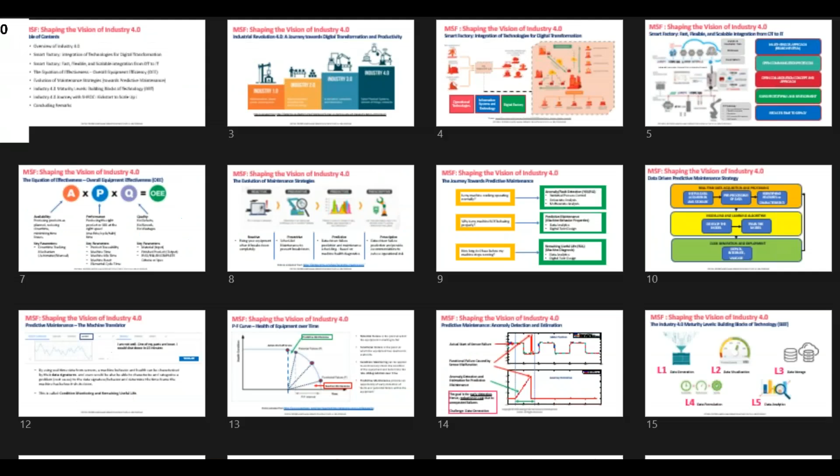MEPN, which stands for the Machinery and Equipment Productivity Nexus, was set up as one of the 9 productivity nexuses under the Malaysia Productivity Blueprint introduced in May 2017. The main purpose of the productivity nexus is to drive the implementation of the initiatives of each subsector as outlined in the blueprint, in close partnership with the government. The Machinery and Engineering Industries Federation, or MEIF in short, has been tasked to champion MEPN on behalf of the machinery and equipment subsector. MEIF is a federation consisting of 8 association members and 1 university member, with a combined membership in excess of 6,000.

In 2017, the machinery and equipment subsector contributed 2.6% of the manufacturing sector's total added value and employed about 93,000 workers. In MEPN, I'm leading one of the working groups focusing on talent and manpower development. This webinar is one of our initiatives working in collaboration with MPC and Selangor Human Resource Development Center, targeting business owners, managers, and engineers of manufacturers, especially SMEs, who are keen to start their journey to IR 4.0.

The title for today's webinar is Smart Factory: Data Generation to Predictive Maintenance. Our speaker for today is Dr. Chua Wen-Shyan. Before I pass the mic to him, let me do a short introduction with his biodata.

Dr. Chua is currently the head of Malaysia's Smart Factory 4.0 under the Selangor Human Resource Development Center. He obtained his PhD in Control Systems Engineering and Bachelor of Engineering in Mechatronics Engineering from Monash University, Malaysia. His key areas of expertise lie mainly in control and automation systems, fault detection and identification, and predictive maintenance strategies. He is actively involved in the IET Control and Automation Technical Professional Network, and is also an active member of the Industry Advisory Panel of Monash University, Malaysia, in the Mechatronics Engineering Department.

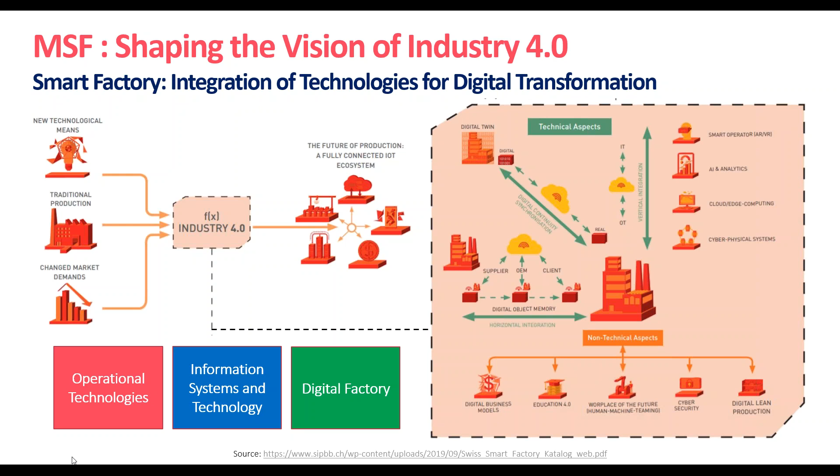So with smart factory, when we look at integration of technologies, we want to see how these technologies can be integrated through a fast, flexible, and scalable integration. We don't want technologies taking too long to integrate, eventually taking a very long time to deploy - that's when you lose time, and time is basically cost.

So when we look at smart factory, we think about it as a multi-vendor approach. Every machine needs to talk together. You have different brands of equipment coming together, different interfaces coming together, but all these equipment and interfaces need to talk to each other.

That's where you look at open communication protocols. If you think about machines, it's a similar concept as humans - when we want to communicate, there's always a common language we try to communicate with, like English. Similarly with machines, there will be a common language where each machine has to talk to each other.

If there is no common language, then of course you have a translator, right? So like, for example, we have Google Translate to translate English to a different language that we want to converse in. So same for machines, that actually happens as well.

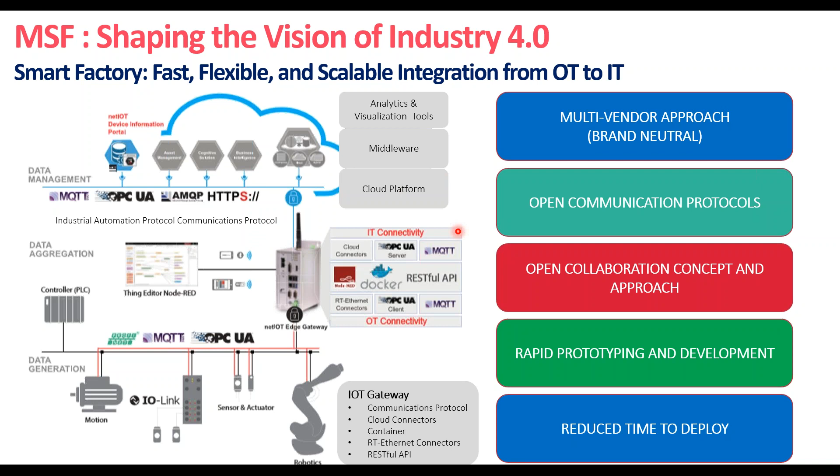When you look at this diagram, at the shop floor you have data generation. You collect all the data from the shop floor with the communication protocols. You integrate it with a middleware, which is where your data aggregation comes in. And of course, what you want to achieve later on is you want to push this data into a database, right? You want to manage the data. That's where your data management and storage comes in. And all this needs to be integrated more or less seamlessly with regards to the overall smart factory concept.

So smart factory automation, or how we see it, is basically an integration of technologies. You don't just look at equipment and say that my machine needs to generate data, I want to make my machine generate data. We need to look at overall factory processes. What is actually important to you to have information? What you want is information.

And of course, you look at industrial augmented reality, if that works for you, to really look at the product specifications through vision scanning. And all these are basically a particular operation where you want to integrate all these technologies and obtain information from every single level. You want to make sure that all this information is collected, aggregated, and managed throughout the entire smart factory automation system that you have. So that's how the integration of technologies comes about.

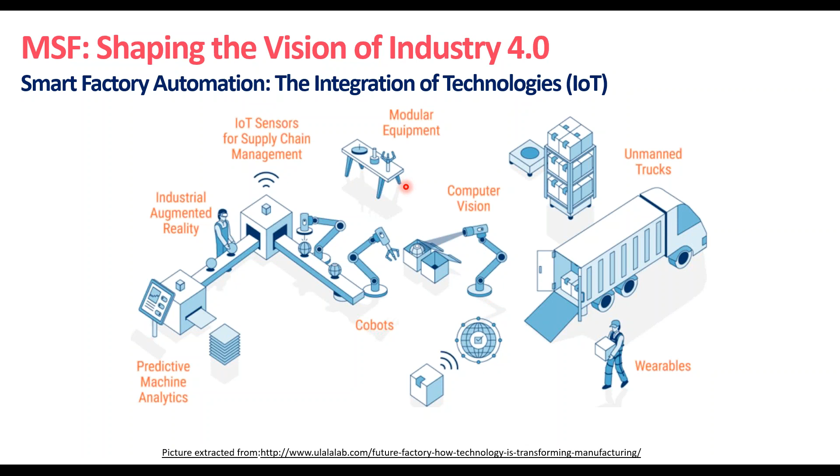So once you have all this information, you get information from your machines, from your shop floor, from your logistics. What you really want to do is find an equation of effectiveness. You want to understand if your current operation is really productive, efficient, and effective. So one example of how we look at effectiveness for machines or production is basically the overall equipment effectiveness.

You look at performance. So for example, you buy a machine, there's a spec that says you can produce maybe 1,000 in 1 hour, but your actual production is only maybe 500 in 1 hour.

Why? So that's where performance comes in. You need to look at what's your machine cycle time, what is your machine idle time, and what's your machine time or operation time actually moving. That's where performance actually comes in.

Now when you look at A and P, that's not just the overall variable of the equation. You want to produce good parts, good quality parts that meet your customer specifications. So then the next variable comes in, which is Q. You look at quality—you don't want to affect the quality. If you increase your performance, you may actually affect your quality.

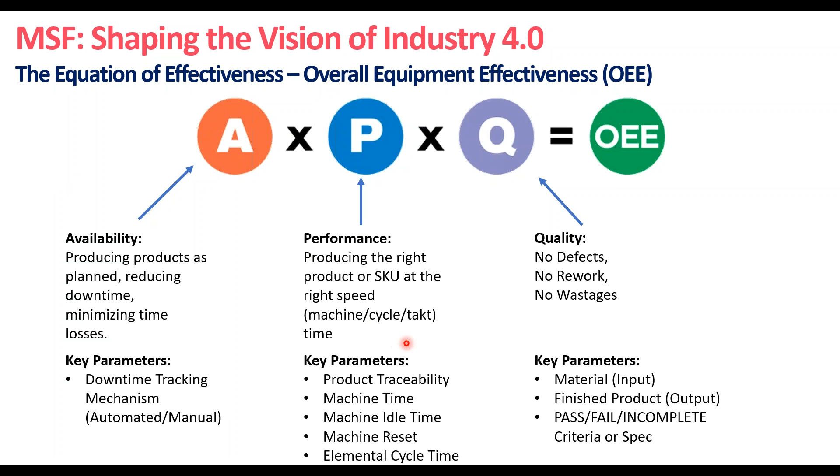So all these are actually related to each other, and that's where we get, for example, an equation of effectiveness called OEE. So that's how you actually look at how data can give you that kind of information or traceability towards developing what we call the equation of effectiveness.

So then when we look at data, what else can data do to really help you in your daily operations? When we look at the evolution of maintenance strategies, we want to go into strategies where it doesn't involve a lot of cost, and doesn't involve sudden surprises or breakdowns. That's where we look at predictive maintenance and prescriptive maintenance.

When you look at reactive maintenance strategy, it's basically fixing your equipment when it breaks down completely. That's the point when you see, oh, my machine is down and I need to fix it now. That actually creates a lot of surprises. When your machine suddenly just breaks down, you have to quickly gather the spare parts to actually fix it, and that takes up time.

So what some industries actually move towards is preventive maintenance. You have PM times—at a particular month, this machine needs to go through a preventive maintenance scheduling. They need to schedule it, replace whatever parts within the line, clean up the line, fix in the right spare parts, and that is basically scheduled maintenance to prevent breakdowns.

Now when we look at predictive maintenance, that's another level altogether. You actually look at data-driven methods to predict when your machine is actually going to fail. You're able to understand some of the signatures or behavior of the machines, the machine health diagnostic, to understand that your machine is going to break down or is bound to break down. That's something we will discuss in more detail in a short while.

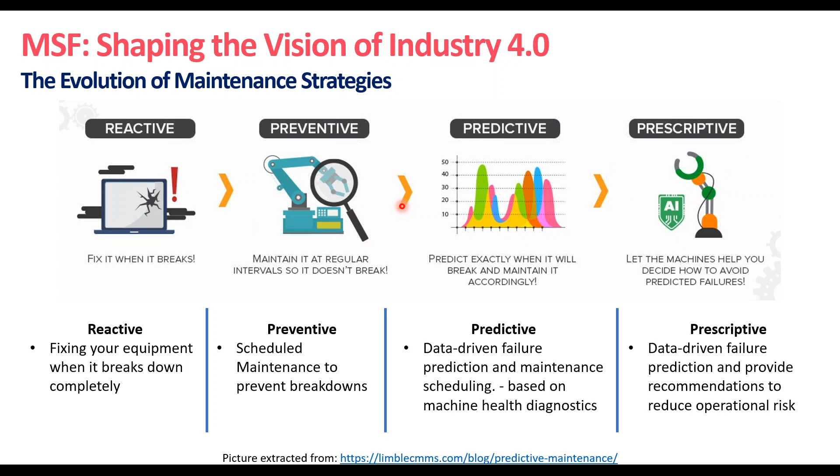Now when we think about prescriptive maintenance, when we put AI in the picture, that's something beyond predictive maintenance, where you have a set of known failures and known recommended strategies to overcome those failures. When you match them together, that's when AI comes into place to really help you in your maintenance strategy. So when a personnel comes to maintain a machine, they know what to do at a very fast pace. That's basically what the evolution of maintenance strategies we share here is all talking about.

Now when we look at the journey towards predictive maintenance, we really need to ask ourselves three questions about what we really intend to achieve. Do you just want to know whether your machine is operating normally? Or do you want to know why your machine is not behaving properly? Or do you really want to know how long do I have before my machine stops running?

So when you want to know whether your machine works normally or not, that's really more of anomaly or fault detection. You want to know whether there is an anomaly in the system that will affect your machine to be at a stage where it is not healthy anymore. When it's not healthy, it will start to slowly degrade and start to break down. So do you want to detect that anomaly at a very fast pace, and do you just want to know that, oh, I have a problem and therefore I will stop the machine? Or do you want to then go deeper into why my machine is not behaving properly?

That's when predictive analytics comes in. You are able to identify what is the signature of the machine that is telling you that it's not behaving properly. For example, is it a bearing having a problem, or is there some problem with the sensor, or is there some other problem like a leakage in the system that we don't know? So that's where predictive analytics comes in.

Now, how long more do I have before my machine stops running? That is basically what we look at in a term called remaining useful life, which is slightly beyond predictive maintenance. With the analytics information you have, you're able to predict the rate of degradation, and eventually understand how long more you have before your machine will stop running. That's the overall picture of the journey towards predictive maintenance.

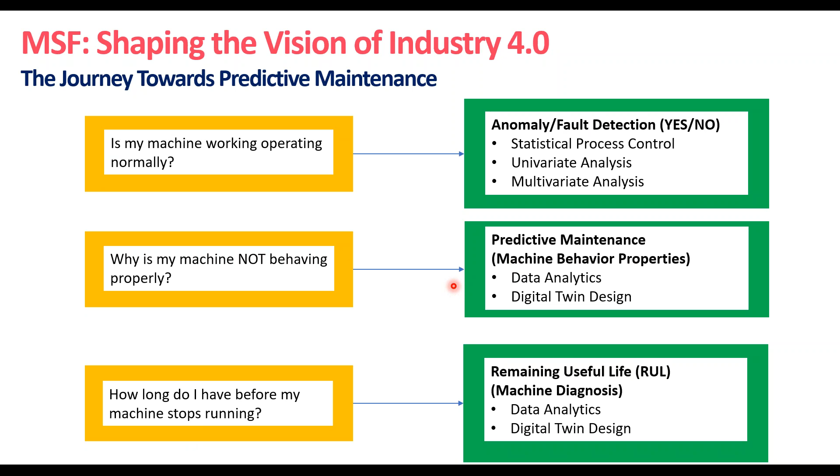Strategies of predictive maintenance really revolve around a similar concept. What we look at is data. You really need data to understand the predictive maintenance strategy. It's a data-driven strategy, so you look at real-time data acquisition and processing, where you take useful data. I must emphasize the word useful, because a lot of people have a lot of data, but most of it is not useful to actually do a predictive maintenance strategy. What we want to emphasize is collection of useful data, and you store it and pre-process the data.

In layman terms, you have a lot of information about a person, and what you really require is useful information to identify their behavior, their characteristics, or their features that signify what that person is all about. From there you develop a model with all this information, trying to have a first impression of a person. You develop the model, and then you train it so you actually understand better what the entire model is trying to tell you. Once you're ready, you deploy it, integrate it into your system, and you have to validate again.

It's a continuous loop. It's not as simple as just putting a tool there that tells you every piece of information about the machine. It's not that straightforward, because a lot of times there's a lot of data involved, and there's a lot of features and characteristics you need to identify, because processes in a factory are very, very different. It's like you need a universal bank or database of data that you can use to do all your feature characteristics.

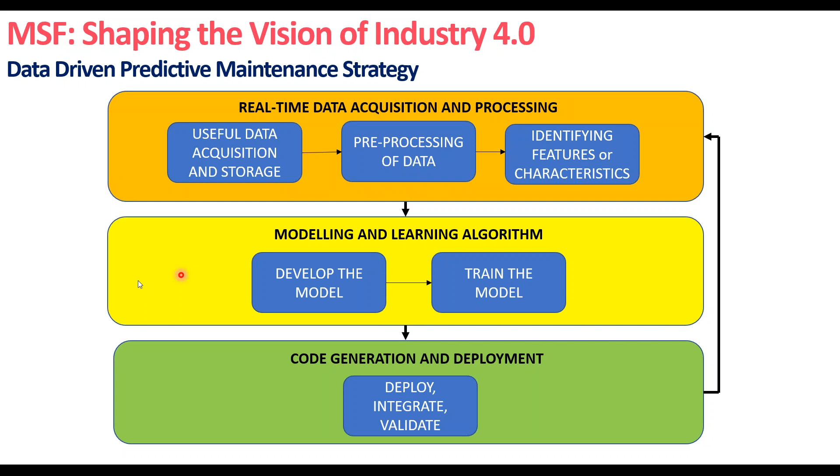That's where data storage is very important, to identify your historian data and develop a better predictive maintenance strategy. So very simply put, how this whole predictive maintenance works is you think about it as a machine translator. Like I mentioned before, machines can talk to you. All you need is for them to tell you in a language you understand. Think about it like Google Translate — you put in English, and you get Spanish or Chinese or any other language you want. Machines are the same, except instead of alphabetical languages, what it provides you is values, data.

If you look at this signal, for example, this is a signal of a motor, and what your algorithm needs to do is detect this, scan through it, and it will tell you, for example, that I am not well — the machine is not operating properly. Using these kinds of data signatures, you're able to predict or detect whether your machine is operating properly or not. That's basically what we call anomaly detection. Based on the data, you're able to tell that the machine is not working.

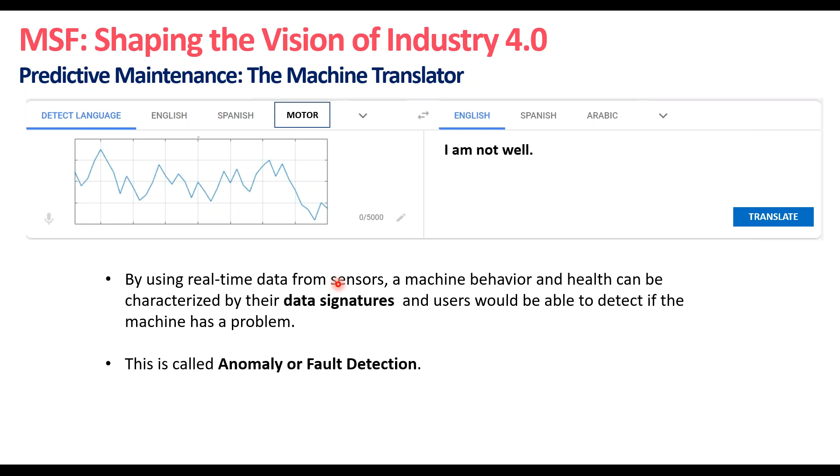When you want to deep dive further, you take the same data set and scan it further to really understand if there are any underlying problems that aren't obvious. You want to diagnose the machine — why is it not well? So you put in other algorithms to look deeper, based on historical data, to find that, okay, I'm not well, and the reason is one of my parts is loose. Then you want to drill down further into how long you have before it shuts down. That's the overall strategy of anomaly detection, predictive maintenance, and remaining useful life. So whatever data you collect is able to inform you of this information through time.

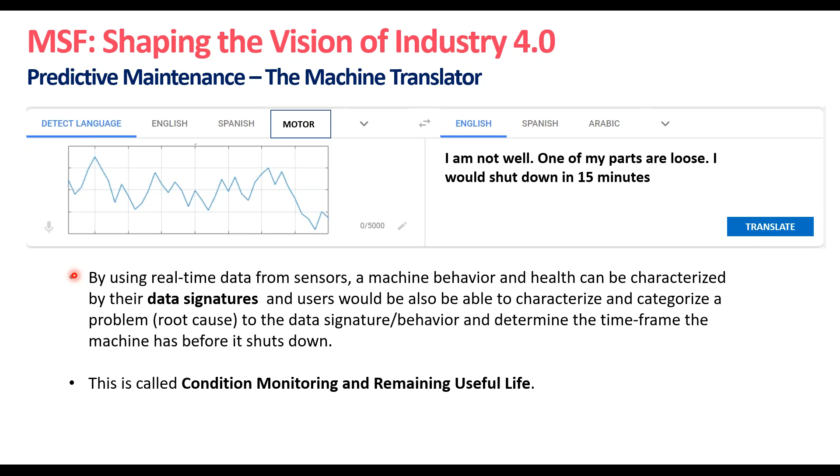And once you're actually able to achieve this, you are able to achieve predictive maintenance and understand the remaining useful life strategies, and that will give you a lot of insight towards your current production systems on whether your systems are operating well, if they are in good shape, and you are able to increase the useful life of machines.

But what affects this is that your cost will actually increase, and of course when you stop the machine and implement downtime, that will affect the overall flow, scheduling, and cost of your particular production.

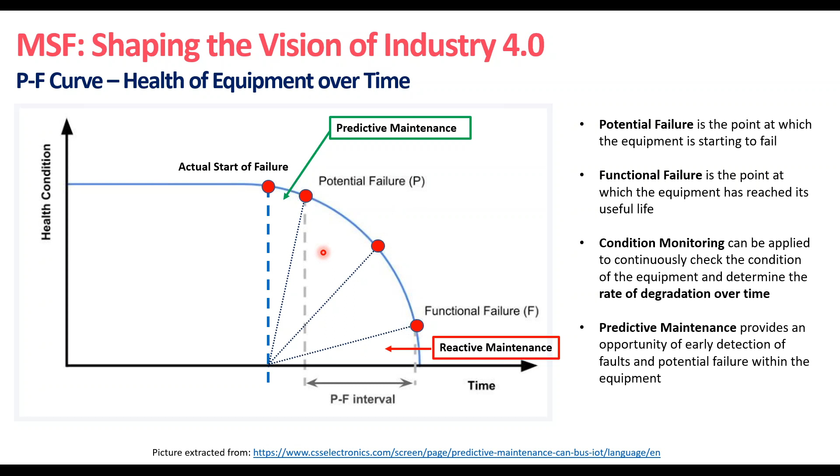So if you look at this diagram, this is a very straightforward diagram describing how your actual start of failure looks like, your functional failure looks like, and your anomaly detection and estimation procedures, which will help you predict the actual failure.

So let's look at these two diagrams. You have motor position, which is your motor running at a standard phase. And then what happens here is there is a big spike, because there is a sudden surge of anomaly within the particular system, which we do not know - there could be a sudden sensor problem, a sudden bearing problem, or actuator problem, which we need to find out.

So if you put in your anomaly detection and estimation strategies for predictive maintenance, what happens in this second graph is you could see a gradual increase of degradation or signals from your sensors that show there is a problem. And if you put in the right strategies, you're able to estimate this particular signal, and before this functional failure happens, you're able to take the necessary steps to mitigate this from happening.

So if you look at this here, you actually see some form of degradation, a very minimal part of degradation, but you are not able to tell whether it's really a machine problem or maybe just your data collection problem.

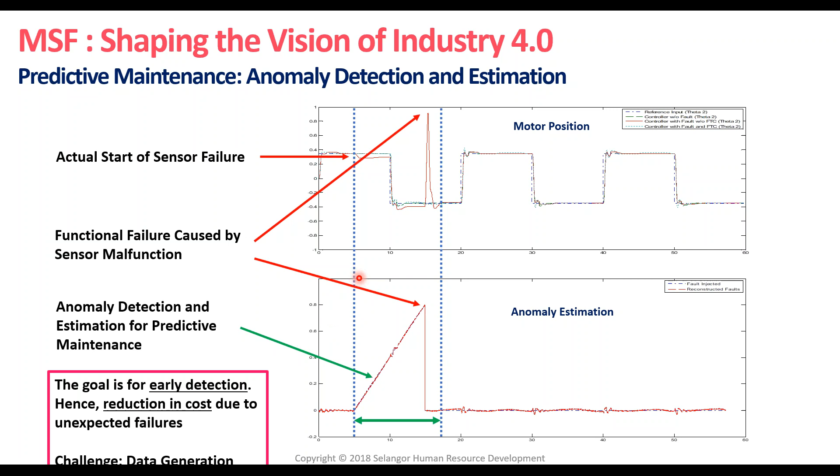So that basically is all data driven, and machines learn in that kind of manner. You need to give them enough data to identify what is different, what is a feature or characteristic of an apple or orange, for it to understand that this is definitely not an apple and this is an orange. So that's what you intend to achieve in the overall predictive maintenance strategy, and that really boils down to the key component, which is data generation.

And with that, let me bring you closer to how we want to achieve effective and accurate predictive maintenance. So we really look at the whole Industry 4.0 maturity levels, and break it down even further. You have the pillar concept, the integration-based concept, which is broken down into 3. Now we go deeper into really looking at the maturity levels of each industry, in terms of building blocks of technology. So we break it down into 5 levels.

Level 1 is data generation. If your machine is producing data, then that's very, very good. If not, you're still at level 1. Now next, level 2, you look at visualization. So when you collect a lot of data, you want to basically make sense of it, and you want to visualize it such that you want to see features along the way. And that's where data visualization comes about — you want to see how this data plotted together will actually look like.

With generation of data visualization comes the important concept of storage. You have many cycles of machines running per day, and you don't want to just collect for one week then discard it. You want to look at overall machine health throughout a certain period of time. As you look at the P to F curve, you have a very straight line of machine health, and then it starts to degrade. So that interval of time isn't just 2 months, it could go up to 8 months or even 12 months, depending on how many cycles your machine runs. It's throughout a whole period of time if you want to really achieve effective predictive maintenance strategy.